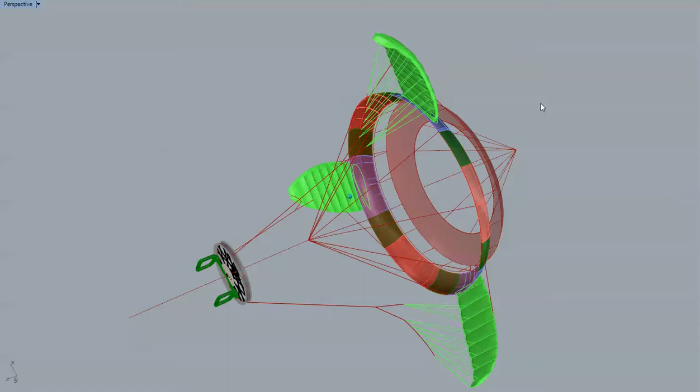So, having had a play with this gizmo in real life now, some things we've learned are that the kites were wanting to rotate a wee bit of a tighter axis than the wheel itself. Say that one would be going on the inside there. Instead of following closely the rotation radius of the ring, it was wanting to sort of swoop about where it was because it was so caught by this.

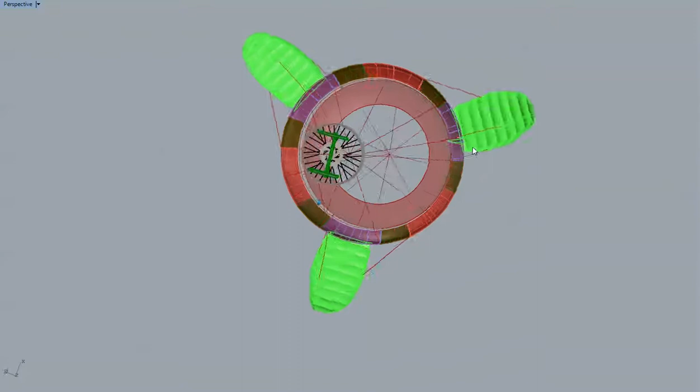So we probably want to either set the kites further back, so take this wingtip from here back this way a wee bit, or slightly inwards, which would give it more lifting room to expand this because it was crushing this leading edge. So you might want to get inwards.

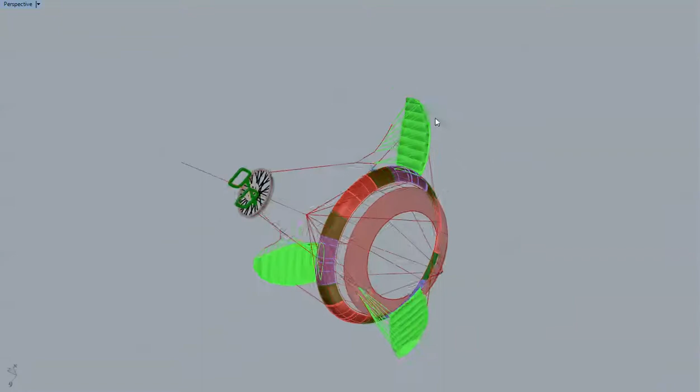However, outwards and flatter, and we're standing up like this. That's more standing up than it was in practice. Standing up - these are the good technical terms. In flight, it was coming about this angle instead of here. That would tend to drive hard around.

It wasn't going around very fast, but then again, they were all fairly light wind tests.

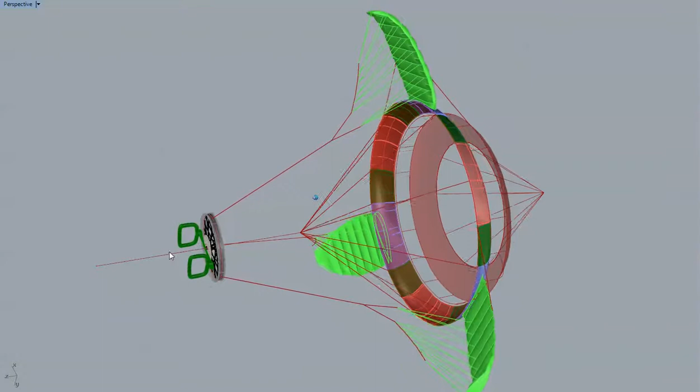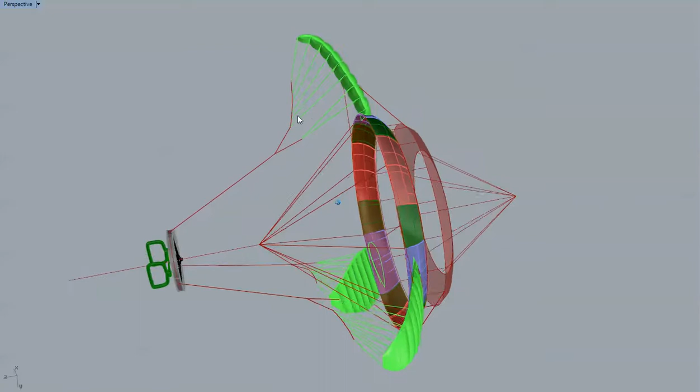Another difference I've shown here, I've got this through-axle control for the ring, and so if you were to push the handles against that, you'd get a difference in tension, or well, line length from where the rim setting is here, which is controlling the kite tether lengths. Now it's a single line tether. You see how it bifurcates here, takes the different sets, and I've strung out, instead of these all coming together as they were shown in the last model, this is how I've set it up in the current one.

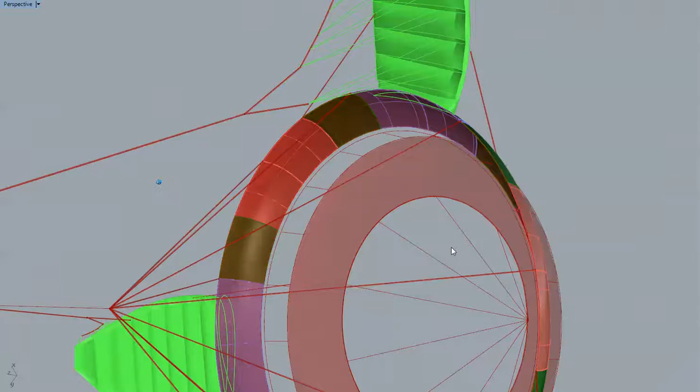It straightens out the line, which helps because I've got that batten tightening up that inner front edge, actually that one there, not the outer one, and it links onto - now you can't see it in this, I haven't drawn it in here - but there's a little T piece I've attached onto the front rim of the ring, and it goes up through there. So at the moment it's from the rim that I've taken a line in the center of these two that goes to here, splits onto either side of the red, so it would go from that point to a point in the middle and then a point on the rim. That's the current setup as seen in the actual test videos.

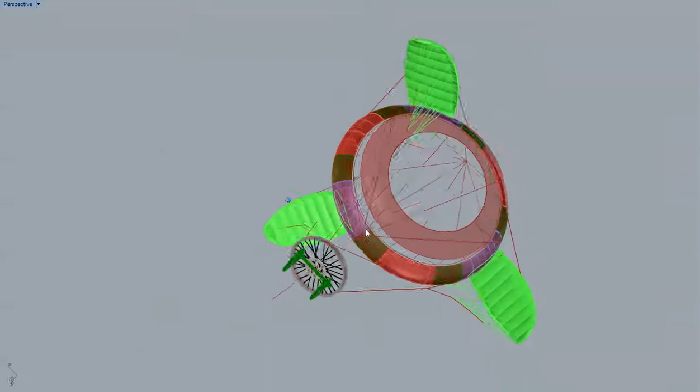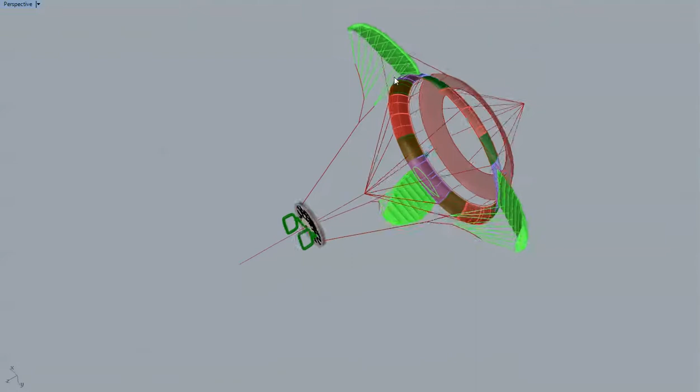This might be better. You get a control and it's a very simple one, and you don't have so much line dragging through the air as it spins. As that spins, anything that's out from the axis is really creating drag. So taking these on the inside here helps the dynamic situation, helps you to keep power. That's why I've got one line instead of two lines going to these kites, because we can kind of adjust the pitch and possibly the turning by how I set this point here.

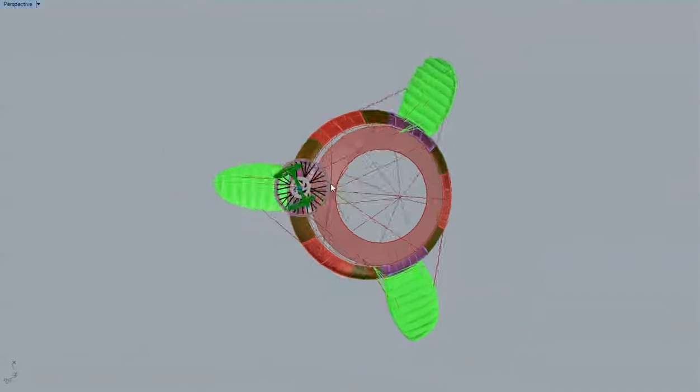I've got 50 centimeters and 50 centimeters at the moment. Changing that balance, I might be able to set the turning radius of that kite so it's much more closely matched to the ring edge radius, which at the moment was 1.8 - oh no, that was 1.8 center to tip, so it's a 360 all in all, which is quite cool sounding because it goes in circles.

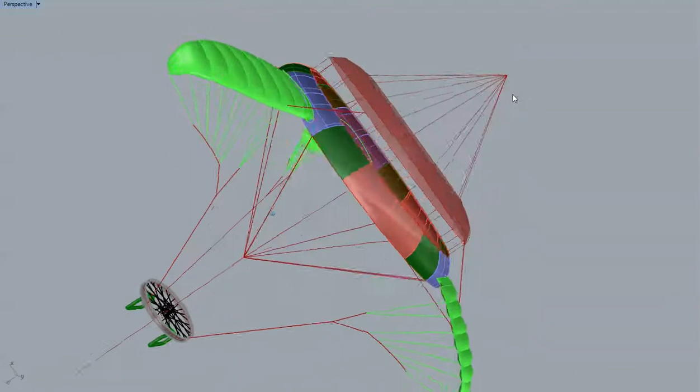I've also suggested - is that kind of how I do it at the moment? I can't even remember. Yeah, I think that's what I've got at the moment. I think it's 9 lifters to about there. That's where I've got the roller skate wheel, which is working really well. I'm happy with that.